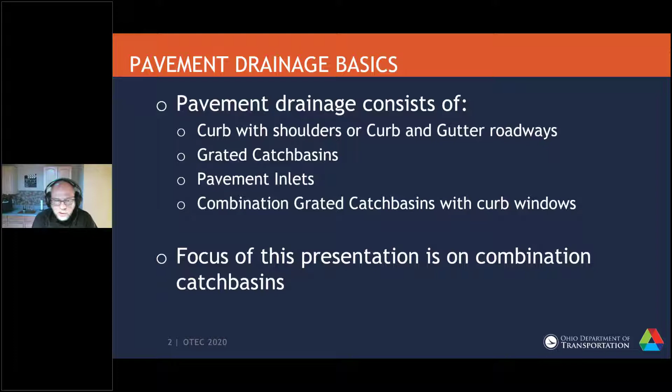All right, going to continue on with a little bit more basics. What we design for is spread. And the spread is based on the hydrology, which generates the incoming discharge. It's also based on the geometry of the gutter and the efficiency of the grate.

A couple of concepts we'll throw out there: frontal flow, which is the flow that basically is the width of the side of the grate where the flow is entering. Then we have this concept of side flow - flow that doesn't directly hit the front but comes down and goes into the side of the grate. Whatever doesn't go either frontal or side is considered bypass, and that's what passes by this structure.

When we're talking about efficiency, that's basically a factor of how much goes in versus how much goes past. As a sidebar, when we design catchments, we try to have a bypass flow - we target around 10 to 15% to allow it to bypass. If you design to capture all of the frontal and side flow and not allow any bypass, that generally creates a lot of catchment structures, and it's not the most economical. So we do allow for bypass.

Now that frontal flow, with ODOT methodology and also HEC 22, which is FHWA's methodology, is considered 100% capture into the grate. The only caveat is once your profile slope of your roadway becomes pretty steep, it's going to increase your velocities, and if velocity gets to a certain speed, it will skip over the grate - that's called skip over velocity. In the ODOT methodology, we don't have that built into any of the equations we currently use, so we're hopeful that through this research we'll come up with a methodology to account for that. Basically once your velocity exceeds that skip over, you'll want to look at another type of catchment, such as a window.

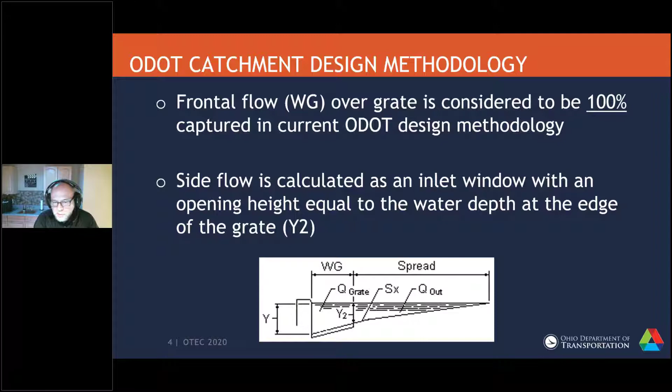Now I want to point out that we do have a combination system here - we have a grate and we have a window. However, the window is not accounted for any kind of intake on the discharge. That's considered a factor of safety, and that's generally the case when we're on grade.

Once we go to a sump condition, that is also the case until your flow becomes significant, using a larger event like a 25 or 50-year event where we really stack up a lot of height on that catchment. Then we'll start to account for the window as well. You can see through the calculations, the window does a tremendous amount of intake, probably more than the grate, but that is considered a factor of safety.

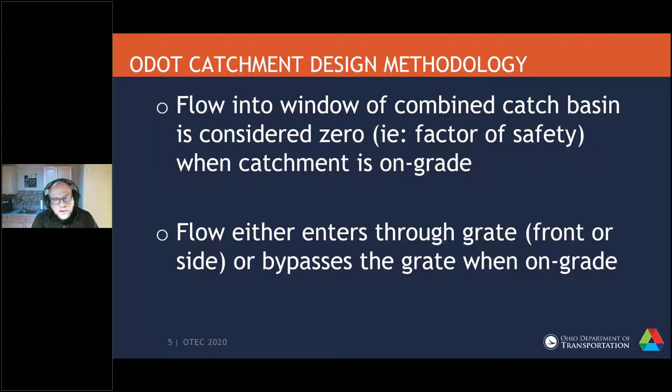However, in the mid to late 70s, the bicycle safety group came to fruition and said this grate is not safe, we need something different. Then in 1976, ODOT introduced this diagonal grate, which was deemed bicycle safe at the time. There were no changes done to the calculations that we could tell, and we were thinking there should have been some sort of change, because obviously the area of opening has changed. That's what made us want to dig in and investigate more.

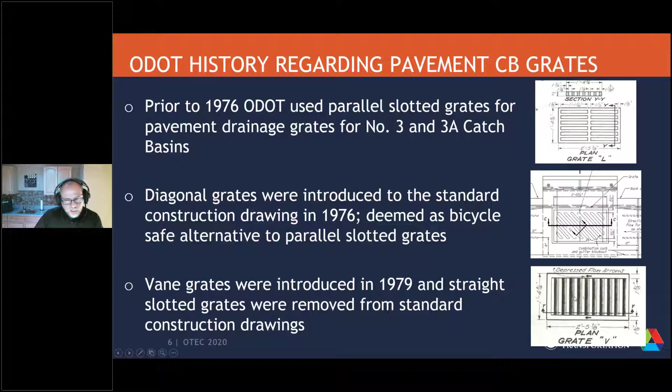As I alluded to, the parallel flow bars are extremely efficient, and that was highlighted in very old documentation from HEC-12, which was from 1969. A lot of the equations we use in the back of CDSS were all founded on HEC-12 methodologies. So we did find a piece of research, and we have standing files at ODOT that contain a wealth of information.

We went digging and found a paper from 1976 that looked at the diagonal grate ODOT was using and the parallel grate, comparing them with a hydraulic study in a lab. This wasn't done for ODOT, it was done for the city of Barberton, which had their own custom grate they were trying to put on their catchments, and they compared it against what ODOT had at the time, the diagonal grate and the parallel slotted grate. Unfortunately, in 1979 we put the V grate on, so that wasn't part of this study.

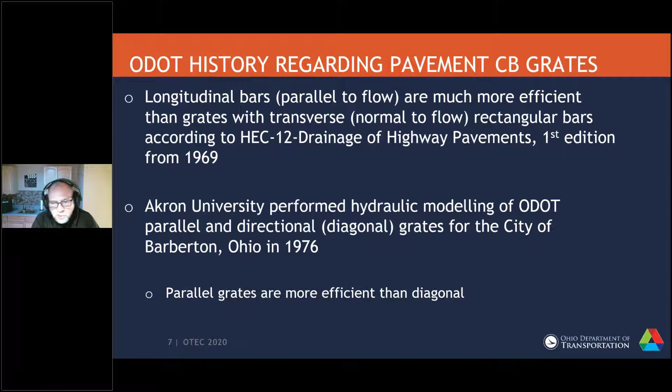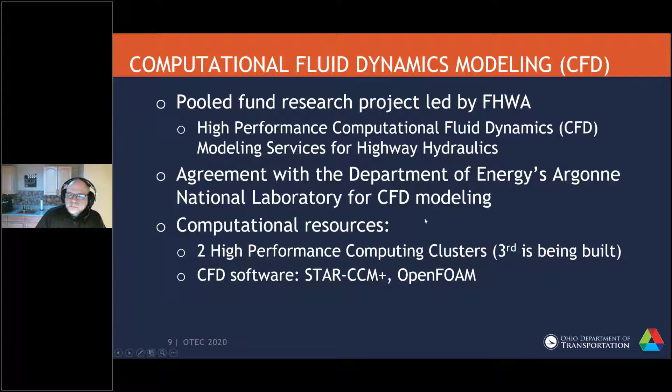Okay, and this will be my last slide before I turn it over to Marta. Through the pooled fund, we want to look at 4 different catchments: the CB3A, the CB3, the CB6, and the number 3 barrier inlet.

Currently, where we're at with this study, we're pretty early on, and we've just looked at the CB3A, because the CB3 will be very easy once we look at the 3A since it's basically just double that. But we are doing some CFD modeling.

And the beauty of the CFD modeling is it eliminates the need for the full-blown hydraulic modeling, which would either be a scaled model in a lab, or full scale in a lab, and that becomes very expensive. You're limited on the different parameters that you can set and change. So CFD modeling takes that into a virtual world and allows you to do a lot more and understand a lot more.

So that goes along with our second bullet. We're modeling a variety of different profile grades, shoulder slopes, pavement spreads, different flow conditions, and we're also modeling sump conditions. And with that, I'm going to change it over to Marta and let her take over.

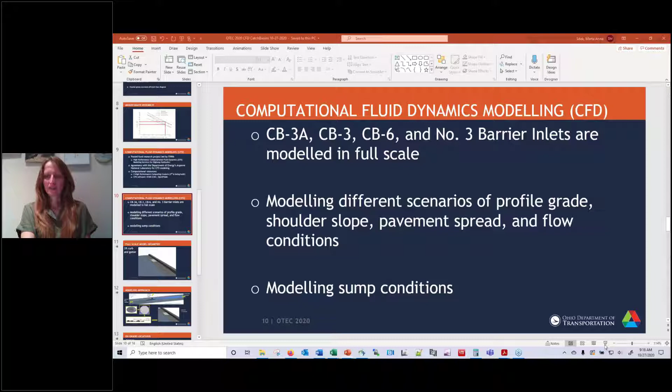Marta, don't forget to unmute yourself. I'm muted by the organizer. Nope, I unmuted you, I could hear finally. Sorry about that. Oh, that's perfectly fine. Okay, looks good, so thank you.

Thank you. Hello everybody, my name is Marta Sitek, and as Jeff already said, I've been working at Argonne National Lab on various projects, but mostly different hydraulic engineering problems. This is a project that I've been working on with Dr. Steve Lottes. He was not able to join us today, so I will present our work to you all.

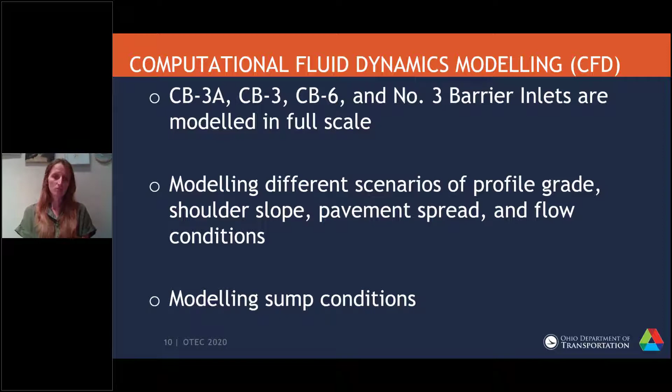As Jeff mentioned, Ohio DOT asked us to perform a series of CFD simulations of different flows over the roadway, and therefore calculate and establish the efficiency of 4 of their catch basins.

We usually build a full-scale geometry of whatever we're modeling, because then you can at least avoid those problems or mistakes that could be related to scaling. So in this case, you could see that we have a piece of a road, a section with the travel lanes, with the gutter. We have the grate geometry represented here, and also the curb opening.

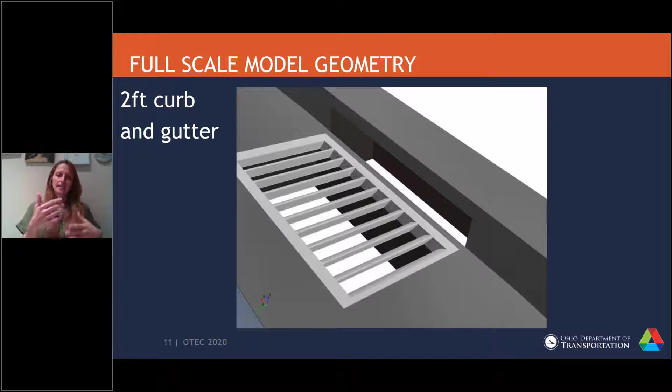This is one of the geometries. The other two that we are considering are with a 4-foot and 8-foot shoulder, and the same with the grate and the curb opening. And the way we model this problem, there are of course many possible approaches. What we decided on is to use...

Of course, CFD modeling, first of all, the Eulerian approach with two phases, water and air. For example, on this figure on the top of the slide, you can see the water colored in blue. In the domain, we also have air, of course, which was not represented, because then everything would disappear and you wouldn't be able to see the water surface.

So Eulerian approach with the so-called volume of fluid model to establish where we do have the interface between water and air.

In this model, what we do is at the inlet, on the right side of this model, we introduce a water flow that then can go into the grate, go into the curb, or in some cases also bypass the openings, the inlets. On the left side, we do have a surface in our domain through which the flow can leave the domain. And we were also asked to...

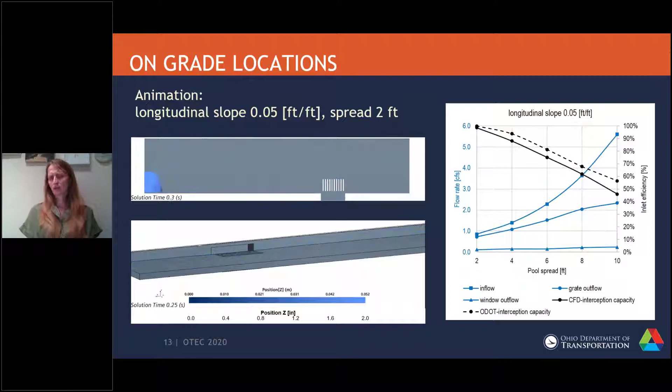We are also comparing against the estimates that ODOT is using right now. For example, here you can see that the efficiency resulting from our computations is slightly lower than the ODOT estimate, but all of those values are within a few percent from the estimate.

When it comes to the SAG locations, this took us slightly longer to set up this model because we were discussing how to set up a CFD model to represent this kind of situation. So what we decided on is to create a model that you can see on the left side, a small part of the air and the road around the catch basin.

Starting with pretty deep water above the grate and above the opening, you can imagine that we take away a piece of a board from the grate and the opening at the beginning of the simulation, and then the water can flow through those two openings and leave the domain. By monitoring the depth versus the flow rate through the openings, we were able to create the plots that you can see on the right side.

They take into account 3 cases: the one on the left side, which is a combination of the grate and the curb opening; a case in which the curb opening is blocked, let's say by debris; and the other case where only the grate is blocked and the curb opening is open.

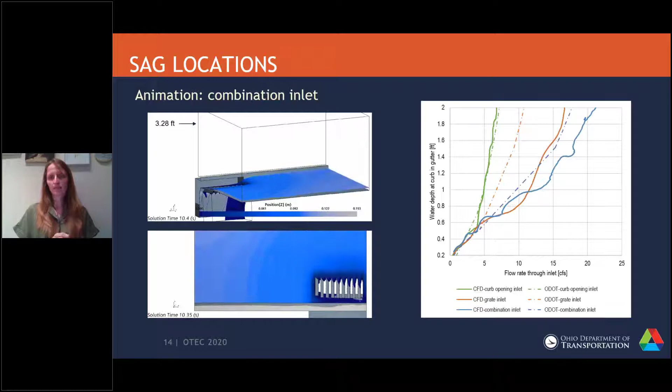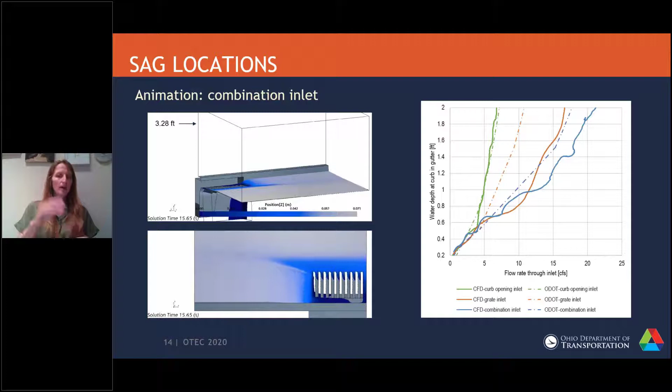The solid lines are CFD calculation results, and the dash-dot lines are the estimates from ODOT. You can see that in 2 cases, the ODOT estimates are more conservative than our results, and in the case of the curb opening inlet open, the 2 lines almost overlap.

The results of this study, this is an ongoing study, that's why I'm showing only a few results. I wanted to focus on talking in general about the modeling approaches and what kind of results we will be getting at the end.

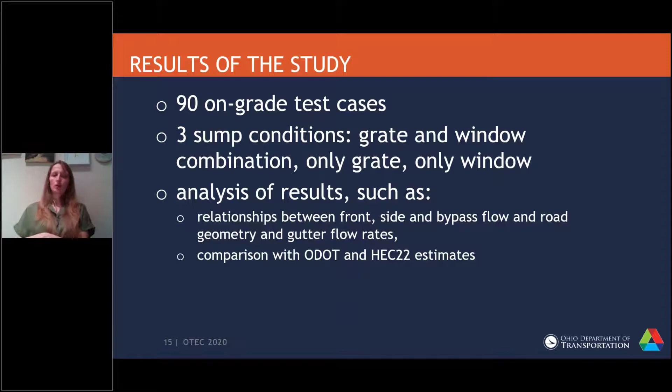We will have overall about 90 on-grade test cases, with those 3 sump conditions we were talking about. We will be post-processing all of those results and analyzing them to find the relationships between different types of flow efficiency, and also looking at comparisons between our CFD results and the ODOT and HEC-22 estimates.

And this would be it from my side. Thank you for the opportunity, and if there are any questions, I will be happy to answer them. Thank you.

We do have just one question, I think this is more for Jeff. Is there going to be a future update to ODOT CDSS due to these research developments?

Love that question. Yeah, so how much time do I have, Becky? Just kidding. One minute.

No, I mean, yeah, there will be some updates to CDSS. We did have some funding, we were going to move forward with it, and then COVID hit and our funding got dropped. So we will be going full circle, trying to acquire some funding, and maybe that's a good thing, so we can try to take some of these results and refine them before we incorporate them. Good question. Okay, that was the only question, so we can move on to the next portion of this.

I'll introduce Kevin White next. Kevin White is the Water Resources Manager with E.L. Robinson Engineering in Columbus, Ohio. He has 29 years of experience in hydraulics, hydrology, water quality, and the structural mechanics of buried pipelines.

He will graduate with his PhD in civil engineering from Ohio University in December, having recently defended his dissertation. This presentation is a brief overview of his dissertation research concerning rerounding of deflected thermoplastic conduit. Kevin? Thank you. Can you hear me okay?

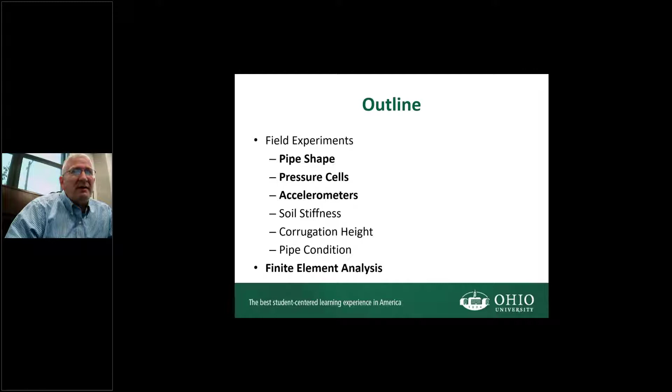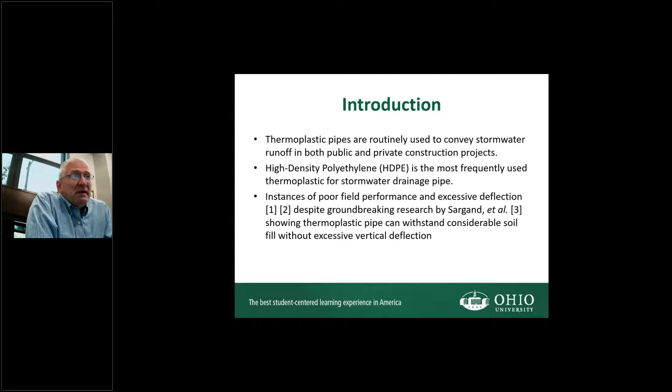So thermoplastics are pretty common at this point for runoff conveyance. HDPE is probably the most frequently used for stormwater. Despite us really knowing that when you install the pipes well, they perform very well, we continue to see poor performance in the field. Typically, we see excessive deflection.

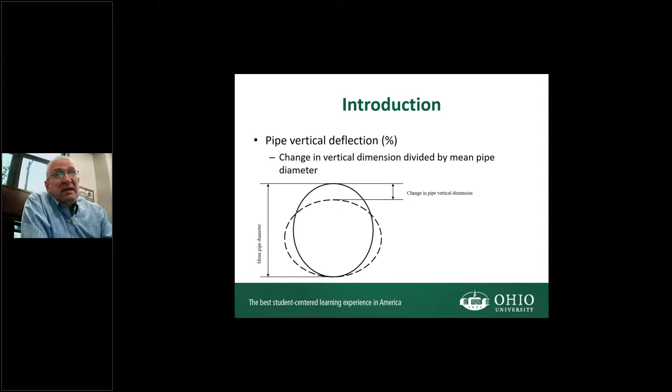When we talk about vertical deflection, we're basically just meaning the change in the vertical dimension of the pipe as a percentage. So AASHTO section 30 tells us that if the deflection is greater than 7.5%, the pipe should be remediated or replaced. ODOT has a similar criteria and says that if it's over 7.5, you have to remediate it or replace it.

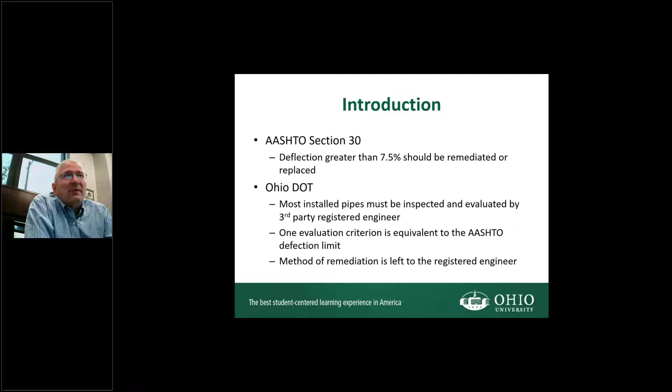The method of remediation is left to the registered engineer who is actually doing the inspection of the conduit. So there's kind of a gray area in terms of what we do to try and remediate the pipe. Rerounding is a very common method for thermoplastic pipes exceeding that 7.5% limit that AASHTO or ODOT tells us we have to meet.

If the pipe isn't really experiencing any other forms of defect, buckling, cracking, anything like that, rerounding is a viable option. And what really happens is it's a combination of vibration and internal pressure.

Despite the fact that this particular product has been around for the better part of 30 years, there's actually been no detailed research on the mechanistic impact of this rerounding to the pipe and the backfill. So that's what we were trying to take care of.

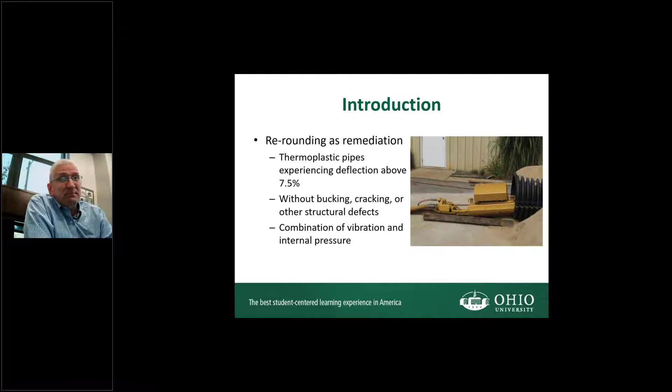We did a series of field experiments, 3 in total. We varied the backfill and we varied the target deflection. What I mean by target deflection is that at installation, we purposefully installed these pipes poorly with the idea that we would target either 10% or 15% deflection. Interestingly, we really struggled at times to get the pipes to deflect. I'm not sure how this is necessarily happening in the field because we had a hard time getting some of these pipes to deflect.

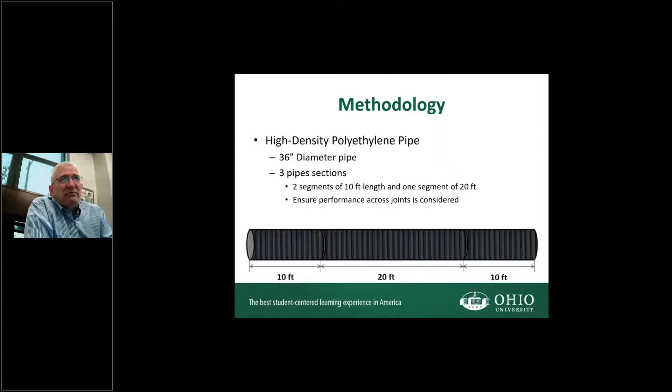The layout is pretty simple. We have 3 sticks of pipe, 10, 20, and 10 feet. This way we can capture the joint performance. All the testing was done with 36-inch diameter pipes.

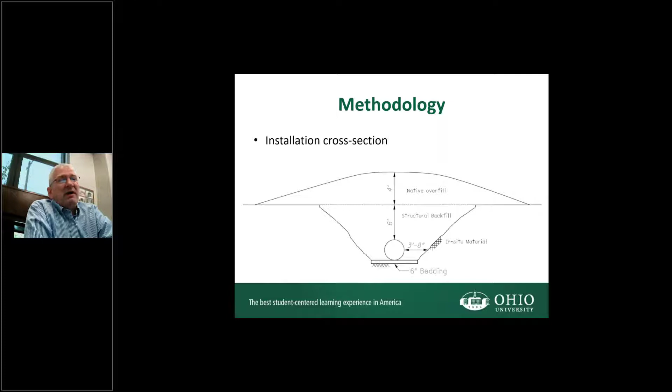The cross section of the installation is a trench, partial trench installation. 6 feet of backfill above the top of the pipe, 3-foot pipes are about 10 feet in the ground. Put another 4 feet on top of that for a total of about 10 feet of fill. 6-inch bedding beneath it, which is what ODOT requires, or used to require in the CMS, and which is fairly typical for installing pipe.

There are 3 backfills, the 3 different ODOT backfill materials, type 1, 2, 3. Type 1 is basically number 304 road base, well graded, everything from sand all the way up to about a number 57 stone. Type 2 is a sand, and type 3 is actually a 57 or 67 open graded aggregate.

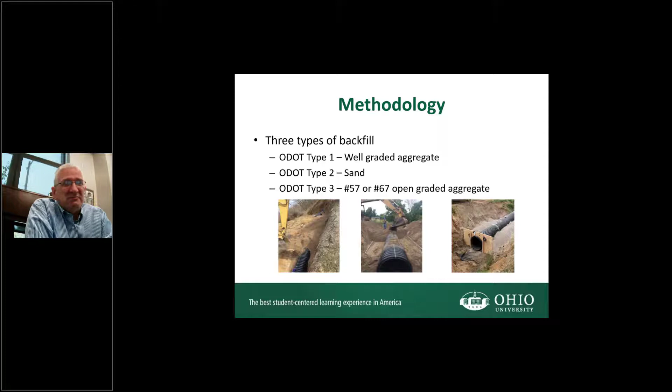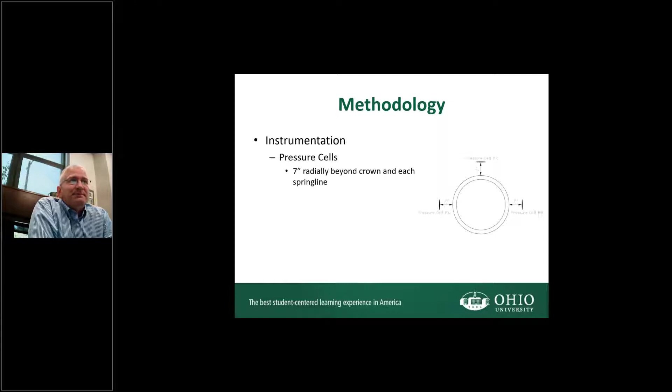The instrumentation included pressure cells. We had pressure cells in the crown and in the spring line, located 7 inches radially beyond each of those. Accelerometers were installed, both horizontal and vertical, in 2 different sets: one at 6 inches above the crown, the other at 12 inches above the crown. The reason for the accelerometers was to understand the vibration of the rerounder and what type of soil accelerations we were seeing, and to understand if those soil accelerations could actually be damaging to the pavement above the pipe. Later on, I'll show you how we went about those calculations.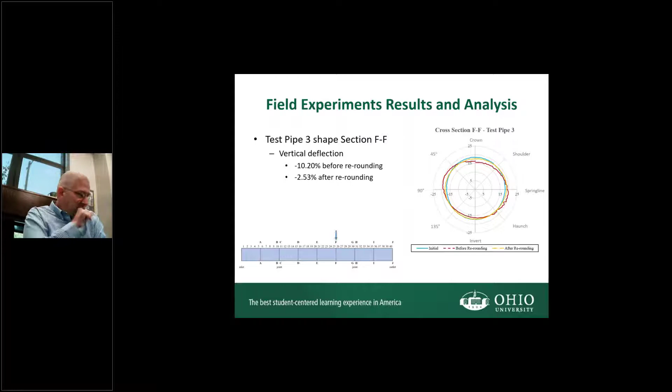Lastly, we look at test pipe 3, which, if we recall, was the number 57s. In this location, we looked at cross-section F. Cross-section E had some difficulty with signal noise.

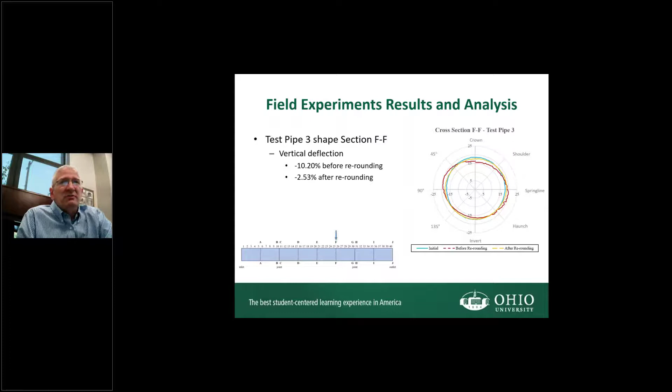In summary, we varied from 4 to 10, and afterwards we went down to 0.6 to about 2.5. So a fairly substantial reduction in vertical deflection.

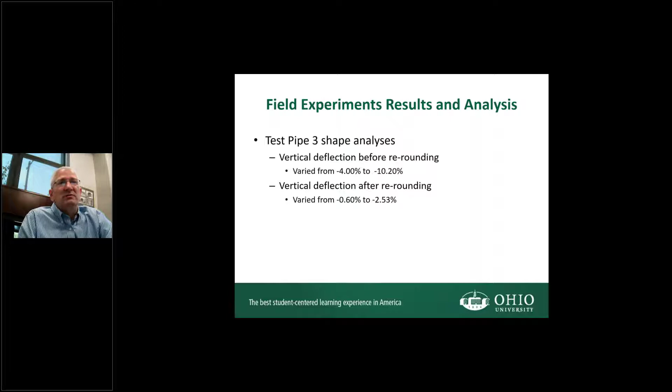What do we get from all of these analyses on shape? Backfill 3 was by far the most amenable to rerounding. That should be expected because it has the highest void ratio, and the particles are able to mobilize themselves most easily under vibration. We saw about 7% deflection removal with a single pass of rerounder.

Type 1 and type 2 have much lower void ratio, so it's no surprise these were much more difficult to reround. For type 1, we had an average of about 1% deflection removal per pass of the rerounder. For type 2, we had about a half to two-thirds of a percent removal with each pass of the rerounder.

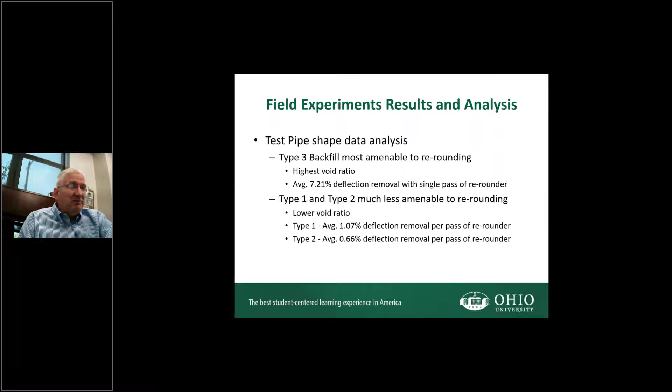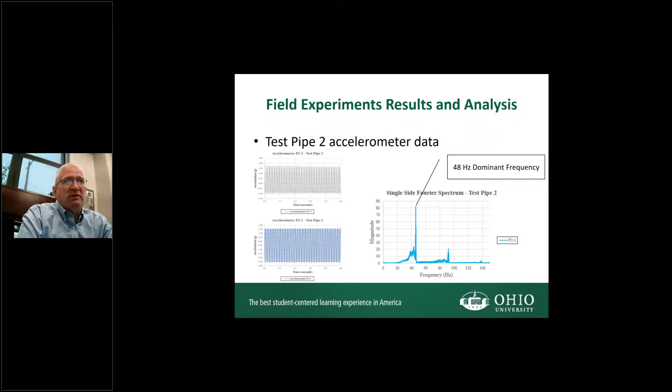From the Fast Fourier Transform, we can determine the dominant frequency. In this case, the dominant frequency was 48 Hertz. I'll explain why this is important in the next slide, but what's important is that the dominant frequency was 48 Hertz.

So we look at the accelerometer data. Once we know that frequency, we can go in and change accelerations into velocities, and that's what we're trying to accomplish. We take these peak vertical accelerations using the equation in the middle of the screen and convert them into peak particle velocities. From these particle velocities, we're able to calculate what's called the damping coefficient.

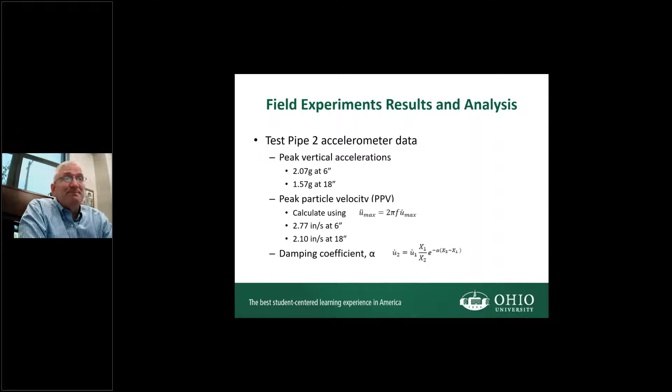What's interesting is that now that we have the peak particle velocities, we can use one of the accelerometer data sets that we know and plug in an assumed maximum limiting peak particle velocity for something like a pavement.

In this case, there's really no good data, so what I did was use 1 inch per second, which is actually the value for a masonry wall, an underground masonry wall. It's a guess — I can't say anything other than that, but it's a guess.

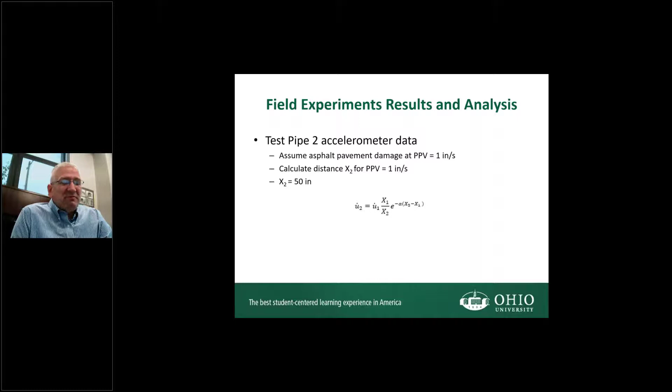So what we do is calculate the distance needed to reach that 1 inch per second peak particle velocity. Going through this calculation, we get 50 inches. That tells us that at 50 inches, we'll get 1 inch per second as a peak particle velocity. If we say that's the point of incipient damage to an asphalt pavement, we can set a minimum depth of 50 inches and say that if we have 50 inches, rerounding is viable.

For test pipe 3, we did something similar, and what you'd expect happens: since these particles move more rapidly and easily because of the high void ratio, we end up with much more damping. Because of that greater damping, we only need 6 inches to ensure we wouldn't damage the pavement. Basically, it's almost impossible to damage the asphalt pavement with the type 3 backfill during this rerounding process.

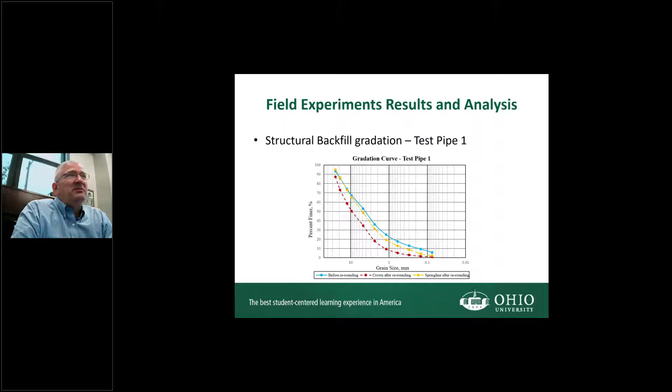What you can see is a definite change in the material gradation. What you're seeing is fines moving out of the material. So after rerounding, the material has fewer fines, which is an indicator that the vibration results in fine particles in the soil moving from upper levels to lower levels.

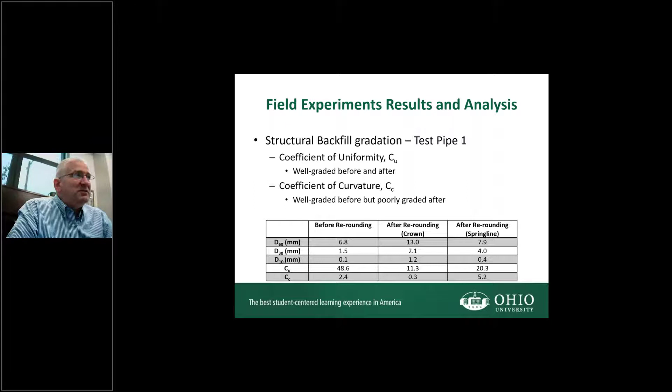Another way we can test this, since engineers like numbers, is we look at the coefficient of uniformity and coefficient of curvature, two different ways to determine what type of material you have, whether it's well graded or poorly graded. The coefficient of uniformity says it's well graded before and after. But the coefficient of curvature shows it's well graded before, but poorly graded after. This is another indicator that the material constituency is changing because of rerounding.

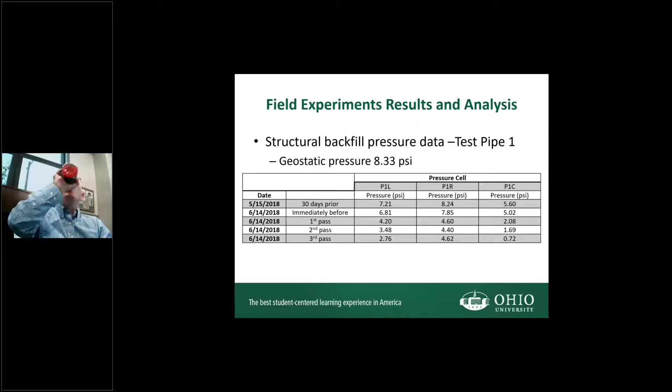Considering the soil, let's look at the pressures for test pipe 1. Keep in mind that geostatic pressure in this particular instance is about 8.3 psi, assuming 120 pcf soil.

If you look at the pressures, in all cases we see a significant drop. When talking about 30 days before to immediately before, we see a small drop, and that's really the stress relaxation in the system. But when we look at the actual rerounding process, pass 1, pass 2, pass 3 for that particular day, they all occur on the same day. The rerounding process results in a significant drop in soil pressures at the crown and spring line of the pipe.

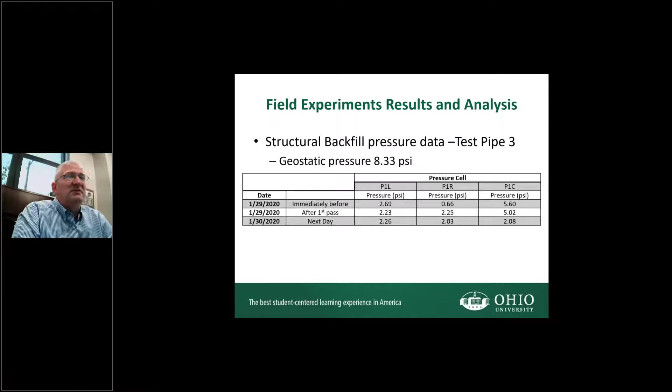Test pipe 3 was a little bit funky. It didn't follow the same trend. I believe this happened because we usually put a sand layer around the pressure cells to help normalize the pressure being applied by the 57s. I'm guessing in this case the 57s were making too good a contact and we were getting point loading, which tends to decrease the overall pressure in the pressure cell.

Last thing I'll talk about is some of the finite element work we did. We used program MIDAS GTS NX. The reason we used it is it's a geotechnical specific FEA code. We used a plane strain approximation. You consider plane strain if you look at your system and say that every cross section longitudinally is the same, then plane strain is appropriate. In this case, we felt it was.

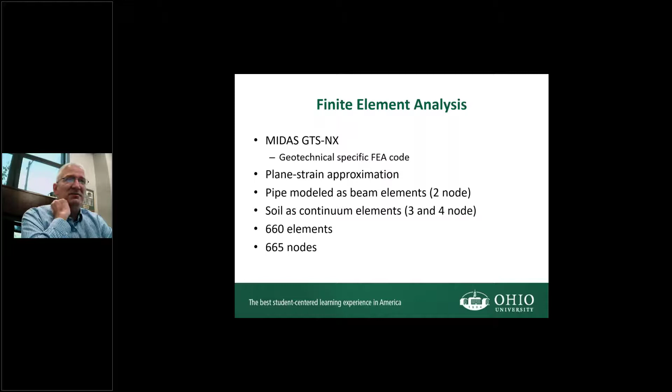The pipe was modeled as 2-node beam elements. The soil was modeled as 3- and 4-node continuum elements. The model had 660 elements, 665 nodes. Compared to what our last speakers were talking about, this is child's play compared to what they're doing.

Look at the model. You see our bedding, all the different soil zones that we utilized, the bedding, the in situ material, backfill, and embankment, all different material models utilized.

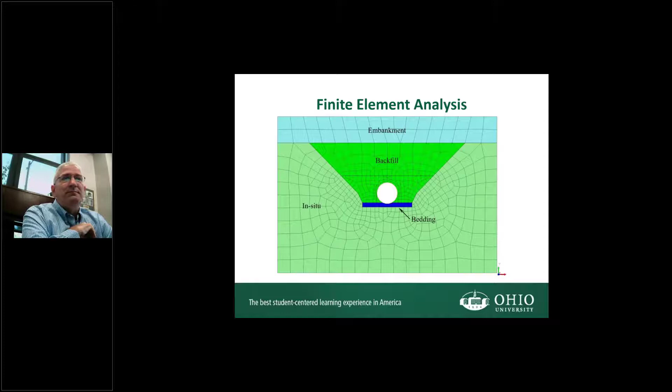The beam used a 30-day modulus of HDPE of 60 KSI. The structural backfill and bedding were Duncan Chang hyperbolic elastic plastic material models. Everything else was linearly elastic.

It was a static analysis, and the obvious question is, this is such a dynamic process, why did we choose static? Well, the reason we use static is because the Duncan Chang is an elastic plastic model, and if you don't approach the plastic limit of the material, then it's purely elastic, in which case static and dynamic makes no difference. Actually, one of the first runs I did was a dynamic analysis, and there was very, very little difference between them.

We did a total of 9 different analysis cases of 3 different compaction pressures and 3 different rerounding pressures. The reason we did this is because we really didn't know what was the rerounding pressure, and we really didn't know what the compaction pressure was. So I just looked through literature, found out what common compaction equipment produces in terms of pressures, and I utilized the exact same 3 numbers for the rerounding because it seemed like the energy was similar between the two.

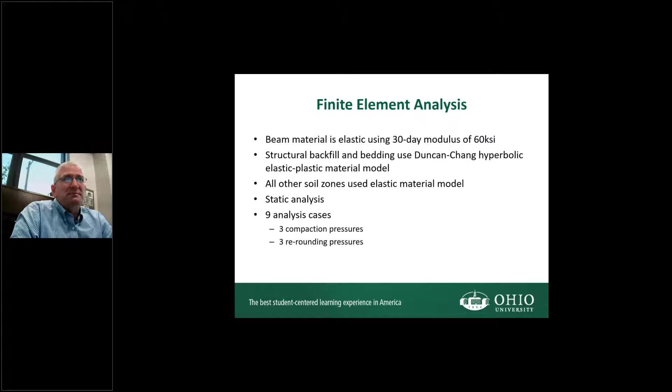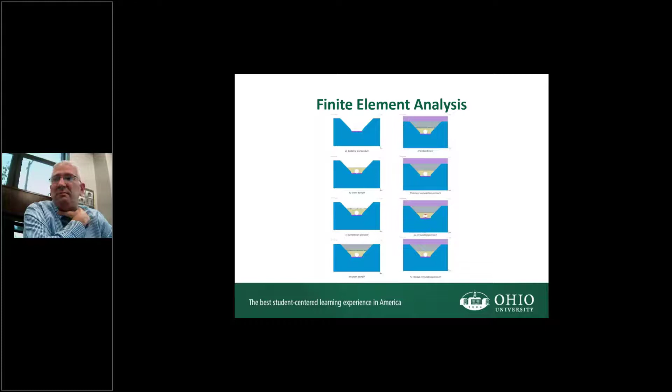And our results, when we look at the vertical deflection before we reround, the FEA tends to under predict the vertical deflection. And this is really fairly common in FEA unless you get into some very, very advanced soil models. It's very, very common to see this type of a result.

Now, what we didn't really know was what was going to happen on the rerounding after we reround it. And what we see after rerounding is that it tends to overpredict the benefit of rerounding. Part of that is because of the fact that it tends to underpredict the deflection.

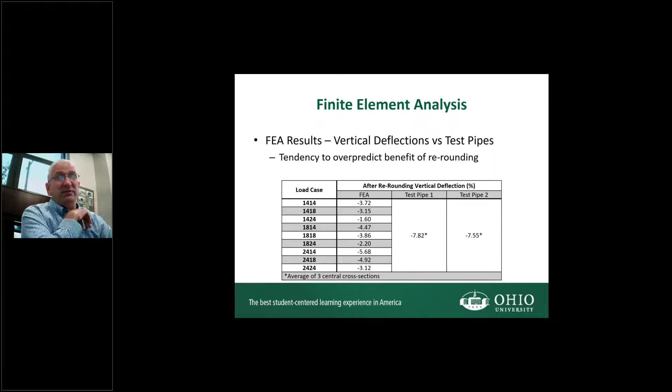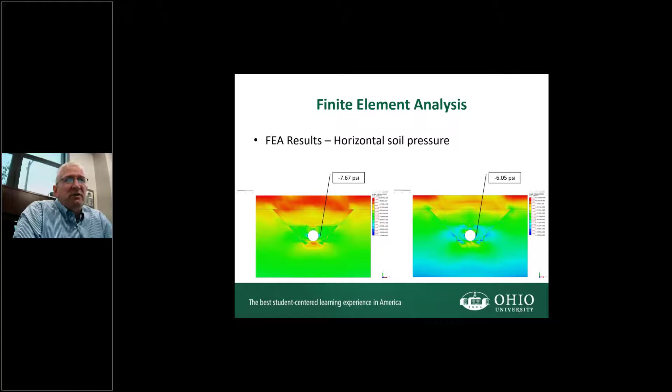If we look at the results from a graphic standpoint and we look at the soil pressures, what I'm pointing out here is the element that's 7 inches above the crown of the pipe, which is where the pressure cell was located. What's interesting is we do see the same trend in pressures, though. We see a drop from about 6 psi down to about 3 psi before rerounding and after rerounding. Similar at the spring line, we see a decrease from about 7 3/4 or 7 2/3 down to about 6 psi.

So when we look at a table, what we're trying to understand is how does the FEA result compare with what we actually saw in the field in terms of soil pressures, radial soil pressures. So what I did was take a ratio of the test pipe value, the field value, versus what the FEA gave us. If you're looking before rerounding, the results are actually fairly good. A ratio of 1.01 means we're only 1% away between the two. Even if you look at the worst case, we're at 1.44, so we're 44% overpredicted.

But that's not terrible when you're talking about dealing with soils and trying to utilize soil models that may or may not be terribly effective indicators of what actually happens in the field.

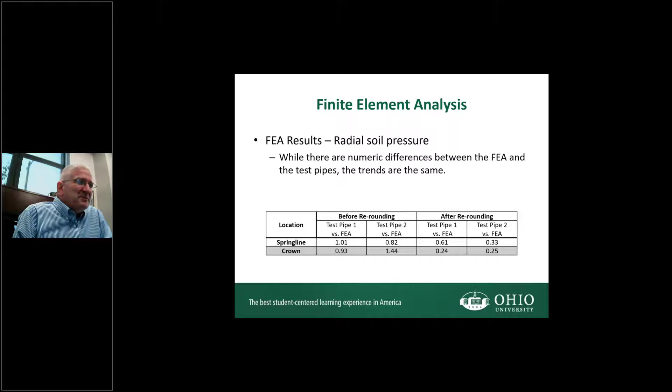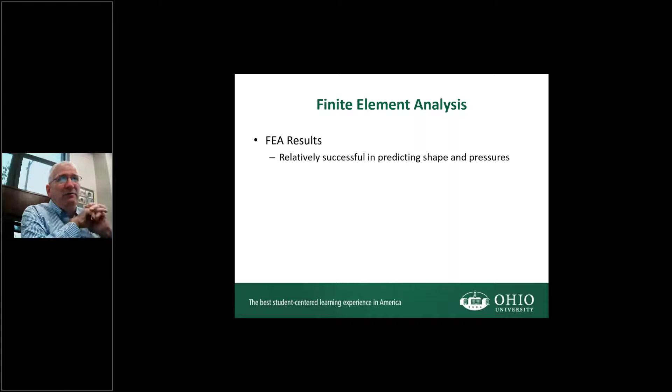Now, after rerounding, that's when things kind of fall apart, and you see that very poor performance. What we can say is that it's relatively successful in predicting shapes and pressures. I don't know that I would go any further than that. And really, that's it, that wraps it up. If there's any questions, I'm happy to try and answer them, and otherwise I thank you for your time.

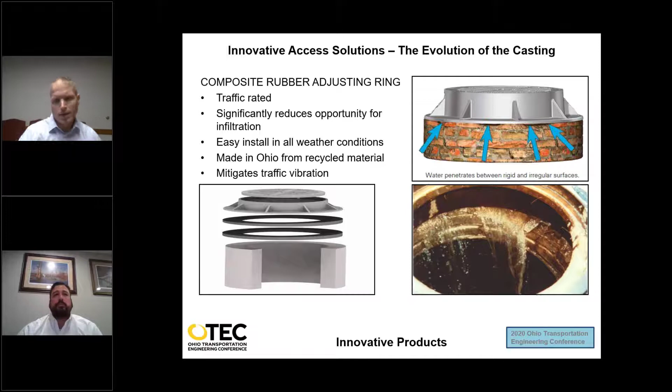So if you're designing a job that needs LEED rating and certifications, these are 97% recycled material, recycled tires. The only part of this that's not recycled is the binding agent we use to make these. It also helps mitigate some traffic vibration concerns and issues.

This next slide, what I hope this graphic will illustrate, is that as a car or vehicle traverses over the frame and cover, it's transferring that load. Normally, under conditions where that final grade elevation was made using, for example, a slurry of mortar or maybe a row of brick, we've seen all different types of things used to shim the underside of a manhole frame. None of those products help disperse the load, whereas rubber disperses the load.

The arrows pointing east and west, and a bit southeastern or southwestern, are indicative of the rubber helping to deflect that load out to the subsoil and subbase, which in turn helps take a lot of that load off the top of the structure.

Because as that iron beats on that structure without an Infra-Riser, or without a rubber adjustment ring in there, if there's any imperfections in either that mortar bed, the brick, or the concrete, that iron's going to win. Over time, that structure will degrade and fall apart. You start losing your fines, and then you start having tremendous issues with infiltration. So municipalities, your customers, are paying to treat water they shouldn't be paying to treat, in addition to the road surface really breaking up and having tremendous issues in and around the structures out in the roadways. So that's this illustration.

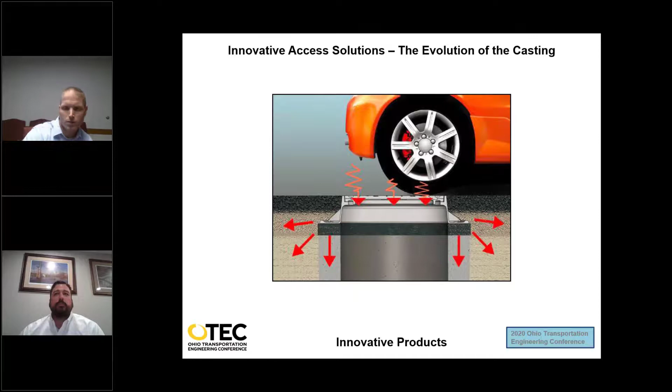I just want to help guide your thinking and understanding that this is not compressing that rubber adjustment ring. That rubber adjustment ring is traffic rated, with very similar compressive properties to asphalt. We don't want it to have a memory, because if it's moving and compressing and squeezing, then so is everything above it—your asphalt, your subbase, your road base, all of that's moving. We want to restrict that movement to allow those forces to be really dispersed out into the soil.

One of the great things about these rubber adjustment rings is that they come in thicknesses all the way down to a half inch, up to 3 inches thick. They're made to fit really all of the castings we make. We make an Infra-Riser that can be utilized in that capacity, whether it be a manhole, a catch basin, or a curb inlet. If you have really old castings and unique situations, we can even cut strips and send those out. There are several municipalities in and around the Cincinnati and Dayton areas that I work with heavily that use their own custom ones.

We also offer these as a tapered application, since we recognize not every road is flat. A lot of them have a pitch to them, and we can taper these up to 2 inches difference—so if one side is at a half inch, the other side can go all the way up to 2.5 inches. This allows for that tapering as well. It's a wonderful product that really helps meet those needs and helps minimize, if not eliminate, infiltration concerns.

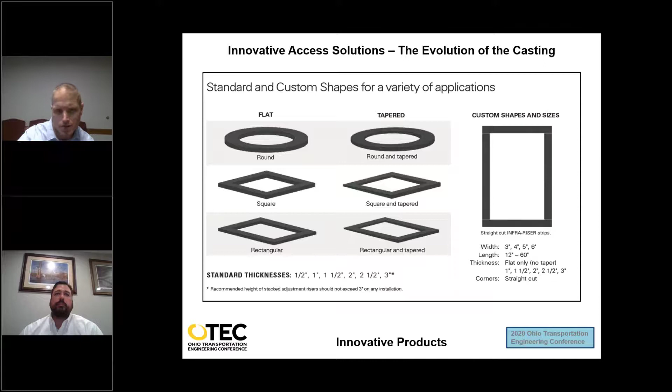So these are designed for use in elevated structures where the cover actually rotates on a steel or stainless steel pin. What that does is allow you access without even having to remove the cover. If you're going to do something like pulling or shooting inverts, you don't have to remove that cover and carry it up and down a ladder anymore. It's just a slight lifting, and it'll rotate in either direction.

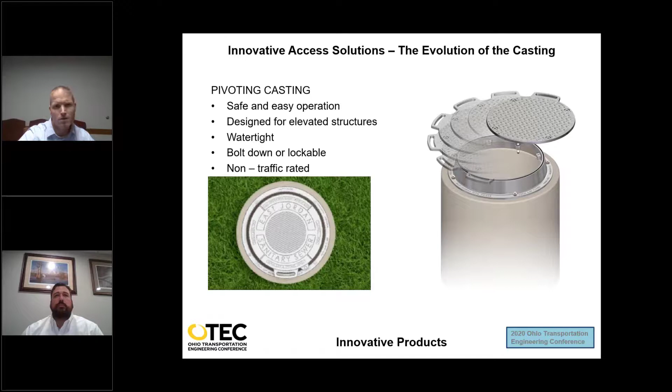That frame and cover are bolted together for watertight applications. These are not traffic rated, they're not designed to be put in traffic areas. They're up on raised structures to allow for a safer way of doing business and safer for those in the field. This casting here is called a storm surge casting.

That arm can be removed so you can have full access to the vault. One consideration we need to take into account when designing these is that you don't want to build traffic stops into the road. So there's a direction of opening, a direction of flow on these, making sure that if it's in a roadway, it properly opens in the right direction.

I'm going to share a video real quick here.

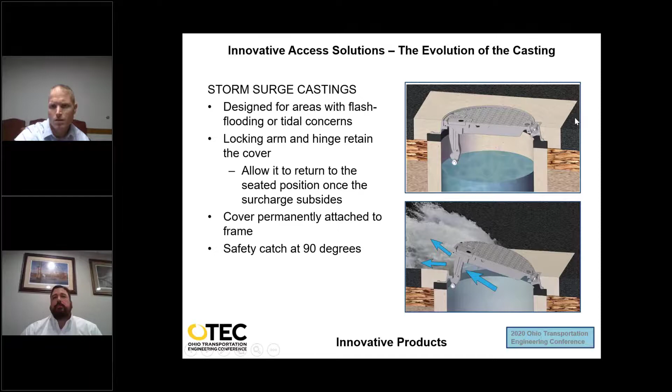What this video is going to show is that pressure build, the casting cover lifts up, engages with the arm, engages for the system to burp, and then flows back down.

So a lot of these applications allow for us, this one in particular, just allow for a safer and cleaner work environment.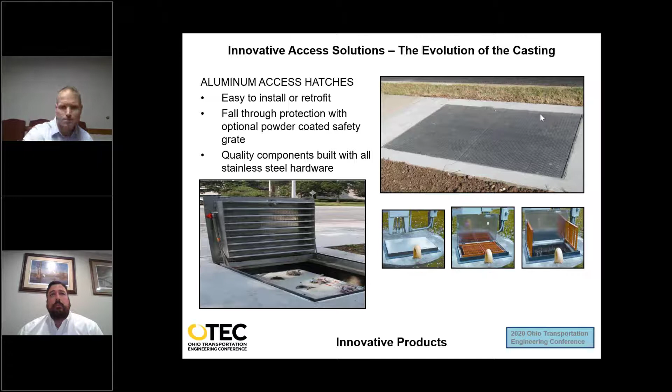Recognize that aluminum will not work for every application where it's going to see regular traffic, which is why we have a ductile iron version of hatches as well, that allow for use all the way up to airports, meeting or exceeding a 200,000 pound proof load rating.

These get very heavy, but thankfully there is a lift assist that one person can operate. It's about 35 pounds of lifting force that's needed to fully open and fully close. You get that assist all the way down.

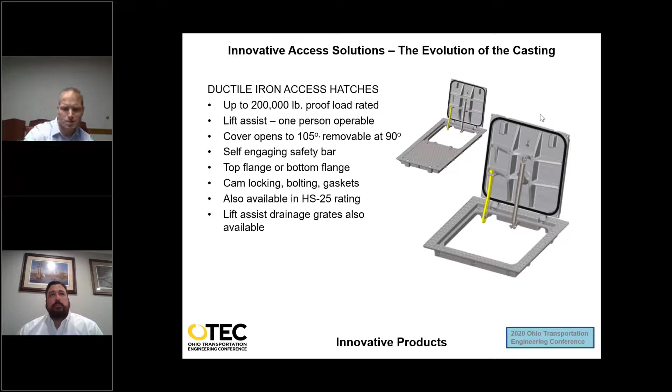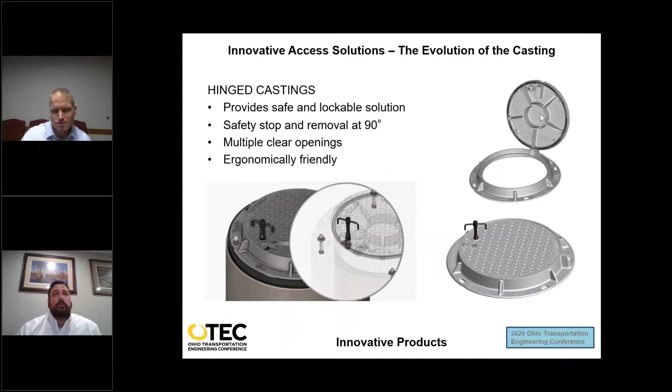Again, we have some hinge castings that allow for easy and much safer access to the vaults, especially things you're having to access on a regular basis, whether they be manholes like this, or the other hinged inlets here. We also have larger clear open ones, for example, for utilities and different communication vaults and such.

The hinged inlets are wonderful because anyone who's had to fish a grate out of the bottom of a structure knows that it's an almost impossible task. These hinged inlets really keep that from happening.

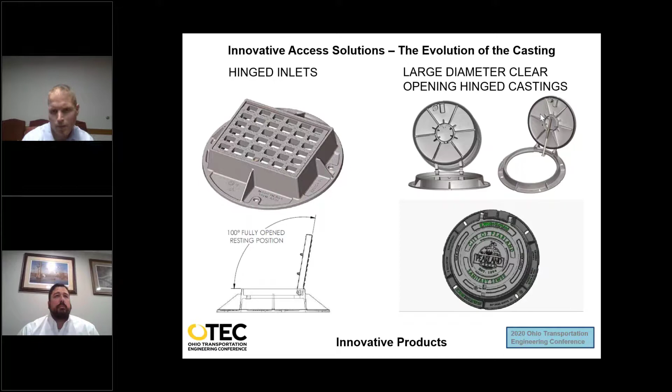Last product I want to go over real quickly is the composite casting. Our composites really provide improved ergonomics. They are telemetry friendly, so you're not having signal interference like you do at times with iron. There's no scrap value, so in areas of really high theft, we have a lot of municipalities around the state that utilize these different products. If you have questions or want references to customers we've worked with around the state on any of these products today, please feel free to ask.

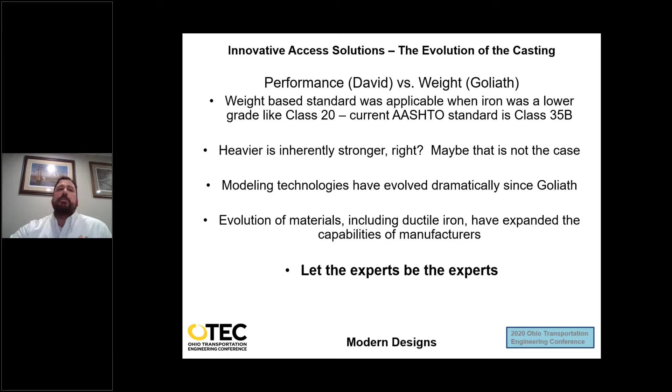So I touched on this—this can be found in the standards for ODOT, and I'm sure for designers out there, you include these standards in section 1 of your specifications. This is ASTM A48, the standard for cast iron or gray iron. A536 is the standard spec for ductile iron castings.

And then we'll talk a little bit about AASHTO—M105 and M306. Really, it's 306 that is the driving force. These two, ASTM and AASHTO, as an industry really dictate how we provide our products. The adoption of these standards is a big part of the specifications that go into Ohio. AASHTO references the materials, the class 35B gray iron, the proof loading, the tolerances, inspection and record keeping, certs, markings, and records.

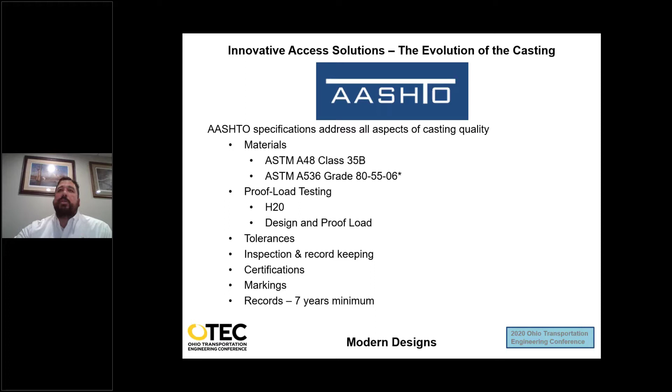So I mentioned a little bit about the difference between cast and ductile iron. From a molecular level, it is different—cast iron is more flaky, and ductile iron is more spherical. Basically cast iron is inoculated with a bunch of admixtures, but magnesium is the primary admixture that goes in there, and it changes the makeup of the iron to provide ductility. So that's one piece of that.

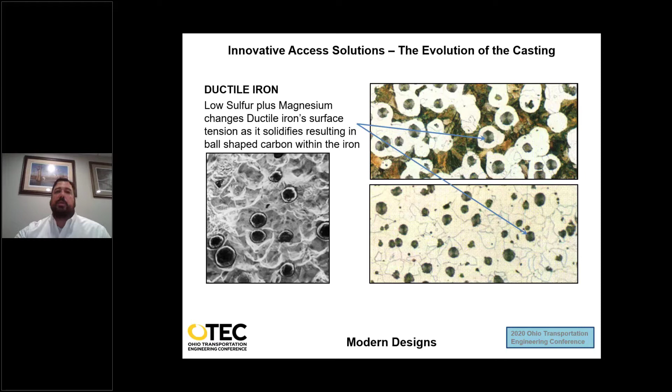Just the understanding—do your research on ductile iron. Allow us, as an industry, to provide research on ductile and its benefits. Ask the questions—it's hard to build a house if you only have half the tools. Ask the question. So I mentioned earlier about heavier isn't always stronger—that was the theory for years.

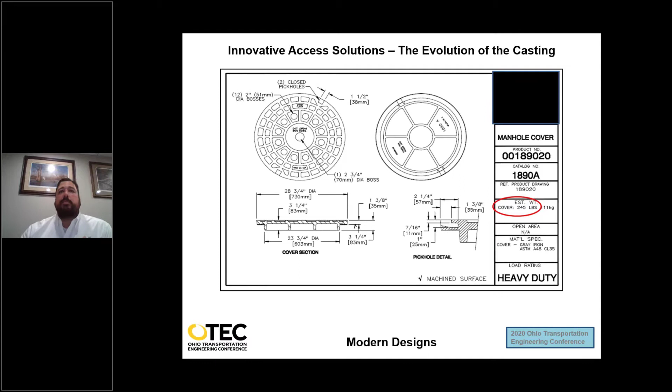But all that aside, case in point—let's talk about heavier not being stronger. Here's a 245-pound cover, 28 3/4 inch diameter, class 35B gray iron. Here's the test: it fails at 63,000 pounds. Meets H20, meets H25 loading.

Same cover with platen design, but the bottom here is different. 28 3/4 inch, class 35B iron, 165 pounds. By my math, that's 80 pounds lighter. And this one fails at 103,000 pounds. So that's 80 pounds lighter, 40,000 pounds stronger.

Why? Because we looked at a new way of doing it, a new way of building it. The industry has adopted this throughout a lot of different product lines. We took a step, with the help of modeling and then going forward with testing. The same step I'm asking all of you to take.

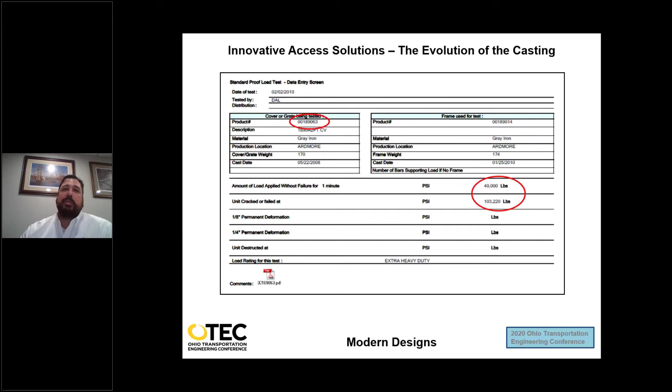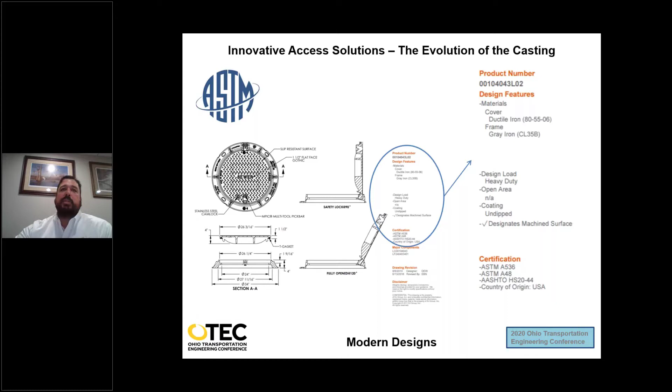So where does that lead? That leads into products like this where there's a mixture. This is a hinged casting that Luke discussed. It's got a ductile iron cover and a gray iron frame. This was designed for performance, designed to meet all these different requirements.

So if you're wondering where to start with this, where to start learning, where to start knowing more about what's out there and available to you, there's websites. I'm particularly partial to one, but there are websites out there for people to access this information. Okay, that's where to start.

Got to find that first step. There's also, for designers, multiple locations to find certain standards and specifications. Again, going back to Dr. Sitek and Jeff's presentation, there's calculators that are available.

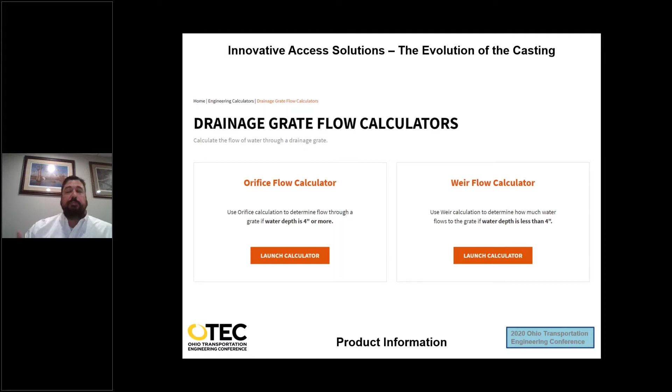Well, I wonder if that casting is going to work. How do I find out? Here's a way to find out. There's websites out there that have drainage grate flow calculators. And what's great about them is they don't stop there. They push you to the next step, they help you find the right solution.

Also along the lines of cast iron detectable warning plates, that's there too. I don't know about you, I didn't always do real well in geometry, and so this has been a welcome tool to have. But there are resources out there for you. This is a great place to get started.

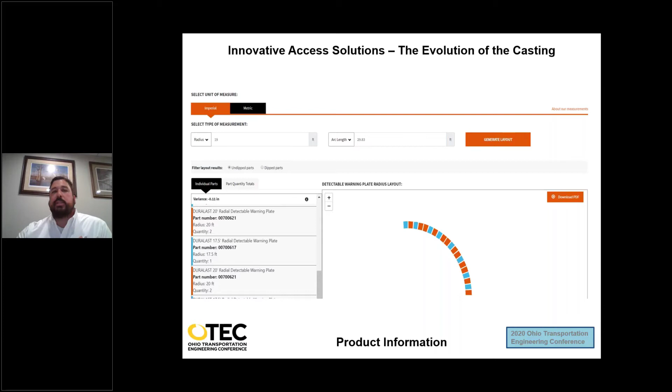You can also talk to us. We're happy to help. I don't know if you can tell or not, but Luke and I are very passionate about what we do. We are here to help. We want to see the progression, we want to see people take that step forward. I know it's easy to do nothing, but it's rewarding to take that first step.